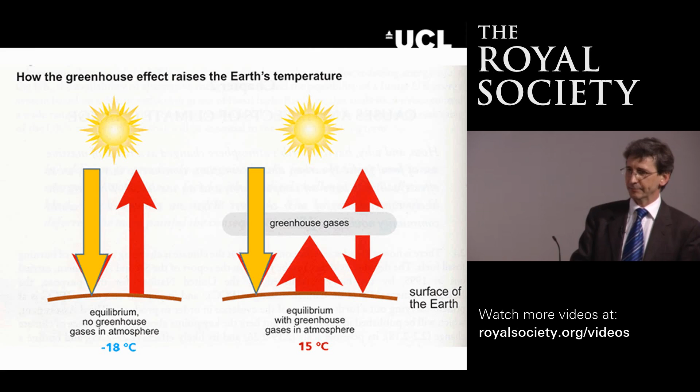If I put the sheet of glass between Chris and the infrared camera, the sheet of glass tends to absorb the infrared radiation. In fact, glass is a bit like the atmosphere of the Earth, the gases in the atmosphere, the greenhouse gases. The glass absorbs the infrared, and the gases in the atmosphere also absorb the infrared.

If you imagine that Chris's head is the Earth and the camera is outer space, and we put the atmosphere in there, then what this is doing is preventing some of that heat escaping. The glass is, in effect, absorbing the infrared radiation from Chris.

Now, not all materials do that. And what I'd like to do is ask Chris to put this over his head. I've been told by Health and Safety to warn everybody not to try this at home.

But what you can see, and what Chris can't see, is that some materials don't absorb infrared. Some materials actually transmit it. And if we had an atmosphere that transmitted like that, then we would find that the Earth was not quite as warm. If you'd like to take that off for a minute.

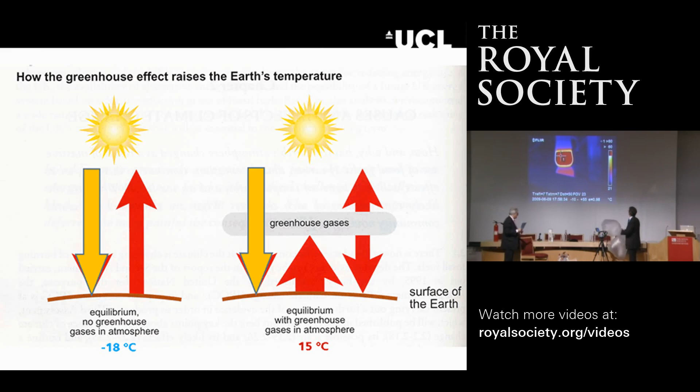Let's see what happens if we look at the top temperature - it's just saturated, which isn't necessarily a good thing. So let's try and see whether this does work. If not, we might have to try it with Chris instead. Let's try redoing this, actually. We might have to add some cold water in a minute. Let me just see whether it brings it down. Ah, right, okay, it should bring it down.

Okay, so this is normal air, and what you should be seeing is that the temperature is now 58.6. This is carbon dioxide, and it's a lot cooler - it's 53 degrees. Well, in fact, it's 40 degrees. So this is because the carbon dioxide in this plastic bag is absorbing the infrared radiation just like the glass was before. It's not doing it as strongly as the glass, but it is actually absorbing it.

Okay, and Chris, if you could just sit back very quickly - there's the last few things I just want to demonstrate. One of the reasons, by the way, that infrared cameras are so expensive is, of course, because the lenses are very expensive, because they can't be made out of glass, since you wouldn't see anything with them.

If I hold a normal sheet of glass, then you don't see any reflection. If I hold this side of the glass, can you see a reflection on there? This is doing something very similar to what you get with a normal metal sheet. Some of you may have heard about putting tinfoil behind your radiators - the reason is because it's very good at reflecting infrared radiation. In fact, even though it's got scratches on, you actually get a very good image. You don't get a very good image in the visible, and that's because of the different wavelength we're looking at.

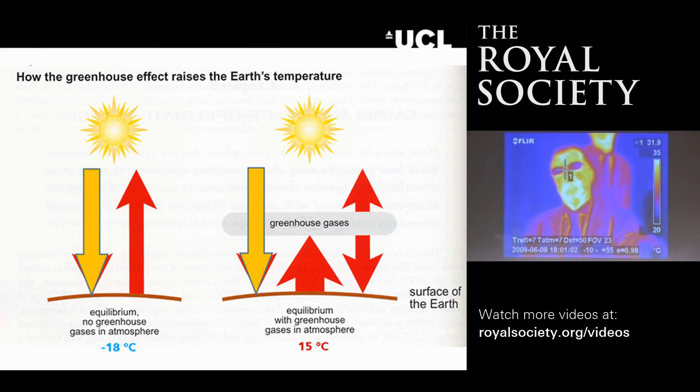But this glass sheet has a property similar to a metal sheet, but it also transmits the sun's radiation. It has a special coating, a low emissivity coating. Unfortunately it's a very old one that's now oxidized - I've been trying to get a new one. Normally you wouldn't be able to detect that it had a coating on it at all. But if you have double glazed windows with this low emissivity coating, it helps reflect some of the heat back towards the room, meaning you can have a double glazed window with the same thermal properties as a triple glazed window. So thank you very much, Chris.

Big round of applause for agreeing to do that.

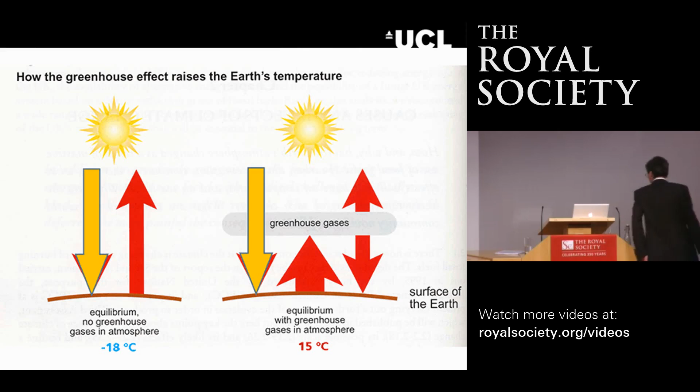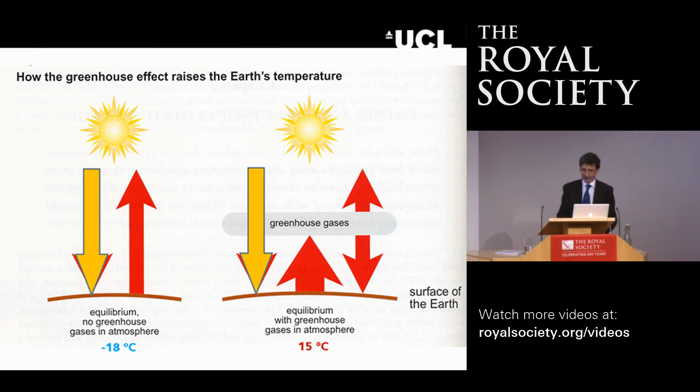Okay, so hopefully that's given you some general introduction to the greenhouse effect, and that you can even in a room demonstrate some of the properties. In fact, we'd have needed a bag about 3 meters in diameter to replicate the amount of CO2 there is between the ground and space, because that's 100% CO2 in that bag. Okay, let's go the right way.

So we need to reduce the emissions of carbon dioxide into the atmosphere, and a large proportion of the balance in the amount of carbon dioxide we have is associated with burning of fossil fuels. Just like Chris keeping his body warm and burning food, he also emits CO2, and when you burn fossil fuels, you will also produce carbon dioxide.

You can see here one of the scenarios for the future - there are many scenarios produced for the UK, for the world, about how CO2 emissions might change in the future. This is done by the International Energy Agency, and what you see is that they're predicting CO2 levels to rise into the future to very high levels, which will cause all sorts of climate change problems, unless we can take a load of measures to reduce that. We really need to reduce it to a trajectory, this lower trajectory here, in order to prevent climate change having severe impacts on the way the whole world operates.

Now, normally, in almost all scenarios that are carried out, there isn't one technology that can fix the problem. In fact, each of these wedges here are different technologies that the International Energy Agency has looked at, that it's looked at as possibly being introduced into the future to reduce CO2 emissions down to the levels that we need to.

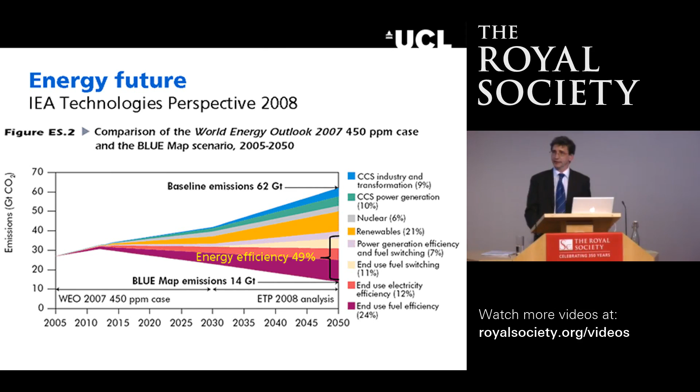So it's actually quite important that we start to move in this downhill trajectory. And to do that, we have to use existing technologies. We can't use carbon capture and sequestration at the moment because we haven't developed it fully. But a lot of the energy efficiency technologies we already have available.

So just to explain again why tackling the existing domestic buildings is key to tackling climate change: worldwide, about 30 to 40% of all primary energy is used in buildings. And in fact in Europe it's higher, in developed countries it's higher, and in the UK it's close to 50%.

The climate change bill in the UK mandates us to an 80% reduction. That's a very large reduction in CO2 emissions, and we will need to put all of the tools into action in order to achieve that target by 2050. UK domestic stock is responsible for almost a third of UK greenhouse gas emissions, and still we use a lot of energy for space and water heating, and we will have to tackle that somehow.

And it's not the new buildings that are the problem. If we're looking at 2050, then the existing stock is already here, that will be here. It will also be here in 2050. And if all of this wasn't enough reasons to try and look seriously at doing major refurbishment to the UK stock, there are other reasons other than climate change which make it important.

There are issues to do with comfort and health in buildings, and to try and eradicate fuel poverty, and also security of energy supply. If we don't tackle demand, energy demand, the infrastructure consequences of building large numbers of power stations, whether they're renewable or nuclear, and the infrastructure to support those will be massive unless we reduce our demand.

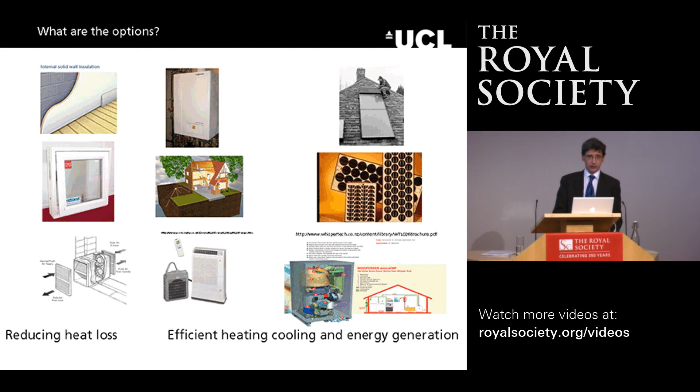And they broadly break down into the technologies that reduce heat loss by insulating the walls, either in cavities, internally or externally, reducing the heat loss through windows, reducing the heat loss through ventilation, improving the efficiency of our boilers or using boilers like heat pumps, which have high efficiencies, or using microgeneration technology, solar hot water heating, photovoltaics, micro-CHP, and also better control systems to make sure that we only use the energy when we really need it.

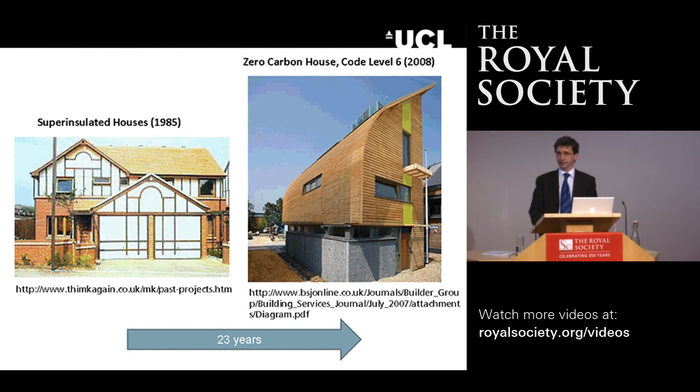Now, on one level, we haven't really done a lot over 23 years, and we drastically need to make a very big improvement if we're going to achieve something. So the challenge really is how we deploy the appropriate technology to 24 million dwellings within a very complex system. I'm going to give you some impression of where the complexity in a lot of this problem occurs.

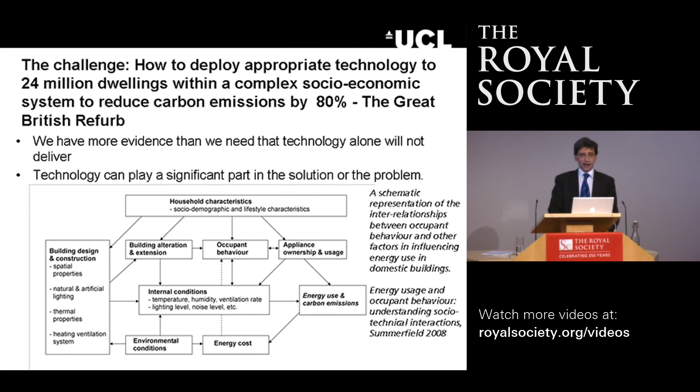But it's not just about designing and building buildings, it's about how people and occupants interact with them, how people use appliances, how they decide to heat them, the environment they keep in them, and that's partly affected by the price of fuel. All of that determines how much energy we actually use or how much carbon is emitted. We have more than enough evidence that technology alone will not deliver the solutions.

Now, part of the reason why it's so complicated in buildings to understand energy, and why we've done actually very little assessment of the real performance of buildings, is because it's something quite difficult to get a handle on.

If you have a car, you only use one form of energy predominantly. You put the petrol in it, you drive it around, and that energy is used for one thing, to move you and the car to different places. A building is more complicated. It has many different sources of energy. It can have gas, electricity. It can also utilize the sun's energy.

We do lots of different things. We heat the building, but we also run appliances and cookers. And there's some interesting feedback mechanisms that go on. So if you replace your existing light bulbs with low energy light bulbs, they'll give out less heat, so your heating system will have to generate slightly more heat.

So it's actually quite difficult to get a complete handle on this, and it's difficult to interpret things. I mean, if you went to the petrol station and asked them to fill up your car with petrol, and you went to pay for it, and they said, well, I'm not sure exactly how much petrol you put in there, so I'm going to charge you roughly £50 for that.

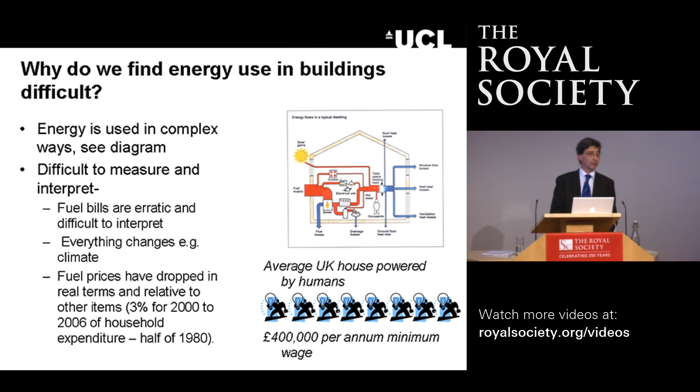We're probably going to have to move, hopefully not all the way to that, but we're going to have to shift our values and our understanding of how we use energy if we're going to tackle some of the problems we need to tackle.

Okay, so the Great British Refurb. The government has recently had a heat consultation in which it has proposed that by 2030, all our homes and other buildings will have received a whole house package of measures covering all the cost-effective, energy-efficient measures available for that property, as well as renewable heat and electricity measures needed to meet our renewable energy aims. That's actually a great challenge for us to do in a way that helps meet significantly the 80% reduction in CO2 emissions.

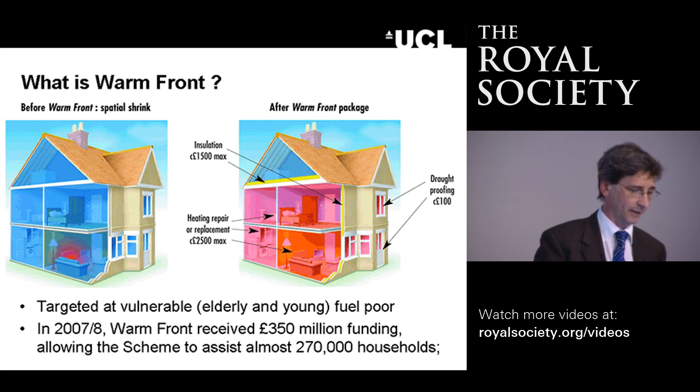The scheme is not directly trying to achieve reductions in carbon emissions. It's predominantly trying to improve the health and comfort of people who are on low incomes. They're eligible for free insulation, a free heating system, more efficient heating systems, and draught proofing.

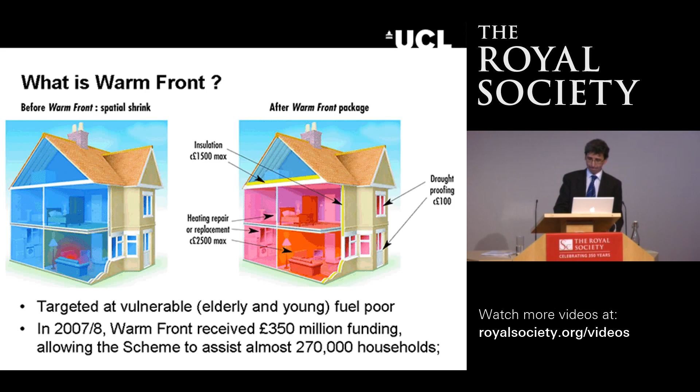We were lucky enough to be involved in a project to monitor about 3,000 homes before and after they had this refurbishment. And what were the conclusions from this refurbishment?

Well, there was an increase in temperatures in livings and bedrooms, which is very good because that's one of the key things that the scheme is trying to achieve. It improves comfort - people felt much more comfortable. It reduced fuel costs, so people saved money. It reduced the occurrence of mould, so the buildings were more healthy. And as a consequence of these, we've got some evidence that it improves mental health directly and should also reduce winter deaths. In the UK, we have something still like 20,000 excess winter deaths.

But what does it do to energy use? Well, the mean energy use actually rises by about 34% as a result of this. And even if we try to measure the energy efficiency, in theory we would have expected the energy efficiency as a result of these measures to improve quite significantly, but we've actually only been able to detect a marginal improvement. So why is that?

Why is it that in theory and practice are not the same? Well, in theory and practice are the same, but in practice they're not, and that definitely applies in this case. So why is it that theory and practice are not the same in this particular case? Well, we have three hypotheses. One is that we apply the physics wrongly. Not that physics is ever wrong - physics is always right, it's just the way that we apply it.

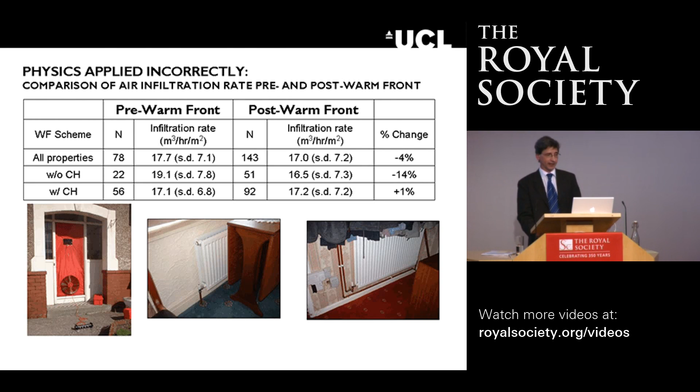So just to briefly give you examples of these - and I'm not going to go into tremendous detail - in the case of the Warm Front, one of the measures we introduced was draft stripping. We sealed the buildings to try and reduce the unwanted flow of air into and out of the building. What we did was we pressure tested these houses, about 140 of them. We put a blower door - the door on the left-hand side with a big fan - which blew air into the building, and how much air goes through the fan determines how leaky the house is.

What we found was that as a result of installing draft stripping in these buildings, we got a slight improvement, a slight reduction in the air infiltration going in and out of the building. So we had effectively sealed up the cracks, but only marginally. We had expected at least a 10%, if not better, improvement. Now, if we looked at the houses which didn't have central heating installed, then yes, we got a much bigger improvement - about 14%, which is more like what we had expected. But if we looked at the houses with central heating, then we got an increase of only 1%.

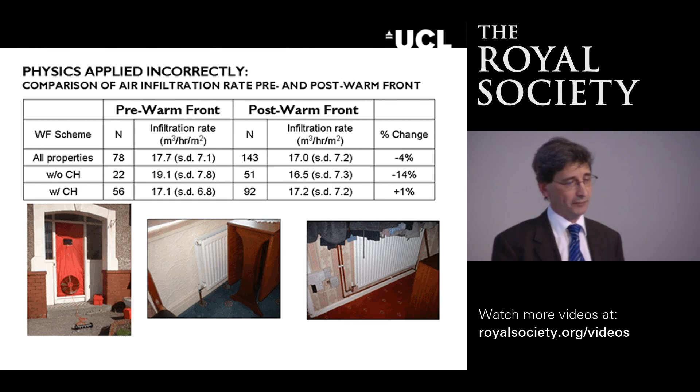A very crude way of looking at this is that on one level you've got a team of people going around sealing up the cracks in the building, and then another team putting in central heating and putting holes in the floors and walls, adding to it. Theoretically, all the models that predict energy consumption say that if you put in draft stripping, air infiltration reduces and you save energy. But they don't say that if you put in a central heating system, it goes up. So we haven't been applying the physics correctly there.

This is an example for new buildings, from work done by a colleague of mine, Bob Lowe, with colleagues at Leeds Metropolitan University. They were involved in a brand new housing development where they spent a lot of effort working with people on site to make sure the insulation went in properly and the building was airtight. Then they measured the heat loss of the building and found it was twice what they had expected.

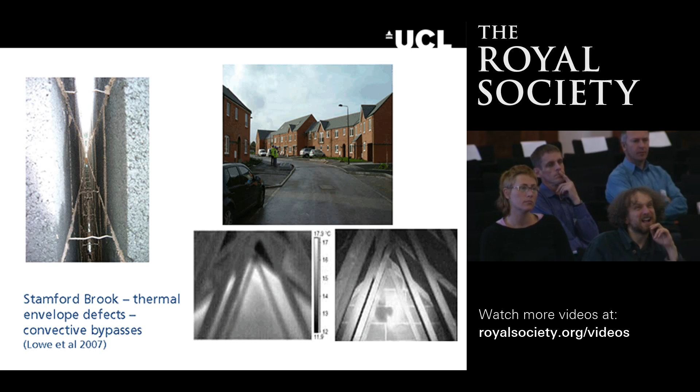They spent quite a bit of time trying to work out why this was. This is an infrared image, in black and white, which shows the party wall in the loft space. They discovered lots of heat leaking up into the loft through the party wall.

When you pay an energy surveyor to come to your house and give you an energy certificate, they will measure the outside area of the building, because that's where normally we think all the heat is lost, through the outside walls. They ignore party walls and internal walls generally, because a party wall is heated on both sides to roughly the same temperature, so you get no net heat loss, or if you do, it loses heat to the adjacent house, and at least they get some benefit from that.

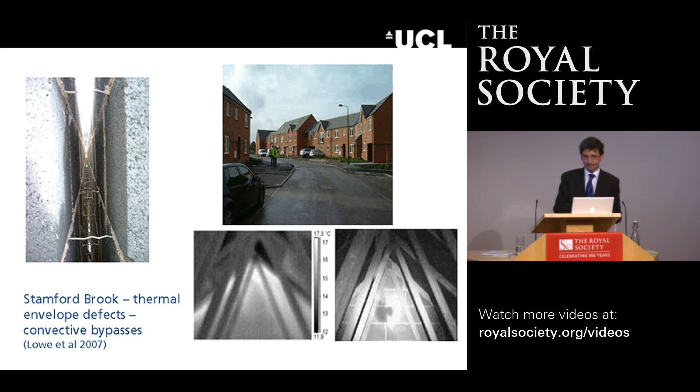But what they found was that modern construction of party walls actually involves cavities, and this is the cavity before the outer brick face went on. This cavity was introduced to stop noise transmission from one neighbour to the other. That's very good, but we sort of ignored that cavity, and actually it acts like a big chimney. It takes heat from adjacent houses into the cavity, up above the loft insulation, and into the roof space where that heat energy is lost.

That means a party wall actually loses more heat than an external wall. That means a terraced house loses more energy than a detached house. That means that if you put an infinite amount of insulation around the outside of one of these houses, it still does not meet what the building regulations are trying to achieve.

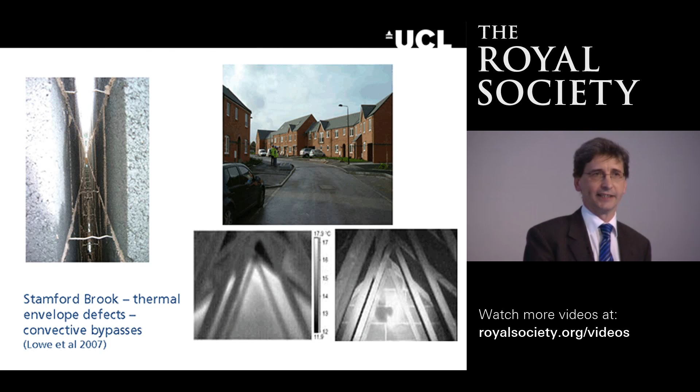The sad thing is it's taken us 20 years to discover this. This construction has been going on, and it's very simple to fix, particularly when you're building the house. You just need to put some insulation in the party wall, and you fix the problem. It doesn't cost a lot of money, it's very cheap to do as you're building it. We need to build a quicker understanding of these sorts of problems, because they are having very large potential impacts.

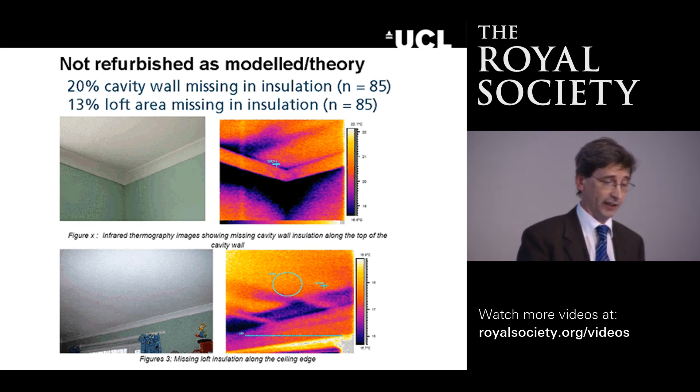Luckily, as a result of that work, they've now changed the calculations, and they're changing the regulations as a result. But what about refurbished buildings as modelled?

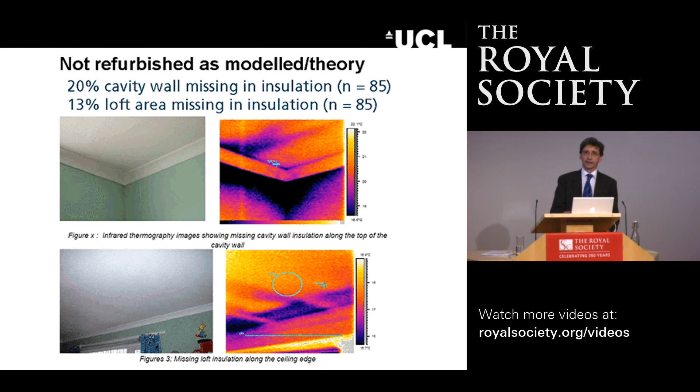It's actually very difficult to get the insulation into an existing building in all the places we would ideally want to, and roughly 20%, 13% in the loft, is missing. That's not just down to poor workmanship, it's physically quite difficult to get the insulation everywhere you want it. We're going to have to work hard to overcome these sorts of problems and try to get the theory as close to practice as possible.

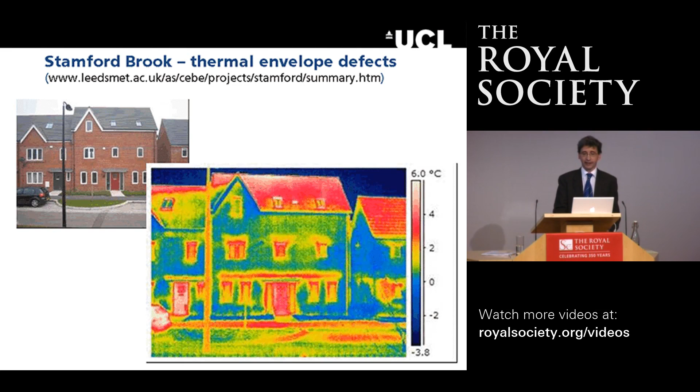And it happens in new buildings as well. Here you can see heat being lost here, which shouldn't be there. The last reason to explain the difference between theory and reality is changes in occupant behaviour. What tends to happen is you add insulation and people take some of that benefit in terms of improved thermal comfort.

That's often talked about as the rebound effect, take back, or the comfort factor. In terms of the Warm Front scheme, that was one of its aims, was to actually get people to be warmer. But any refurbishment project will suffer from this, not only in the fuel poor.

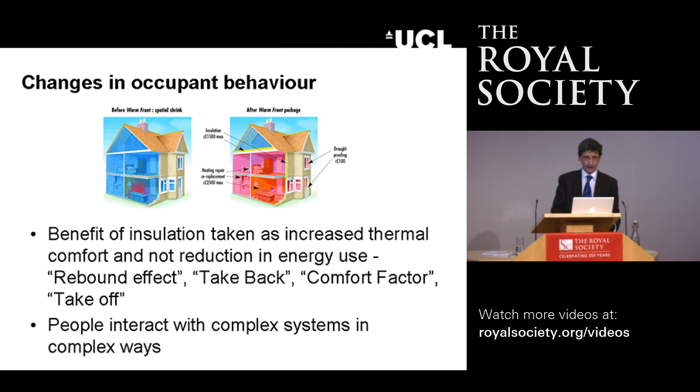People interact with the complex system that you've got in a building in complex ways. In the case of the Warm Front scheme, we introduced new, more efficient heating systems than the existing ones. But we didn't take the existing heating systems out, we left them in. And a lot of people carried on using the existing systems, even though it may have been more efficient to use the new one.

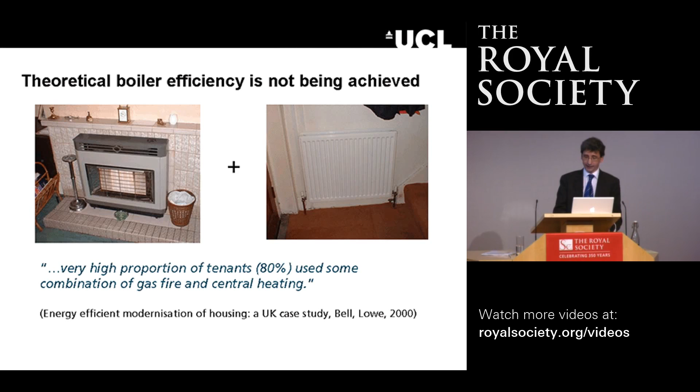An extreme example of the rebound effect is an area I've been researching for a couple of decades now, which is the domestic conservatory. It's very loved in the UK, we build about 100,000 conservatories a year. About 20 years ago, if you built one and had your house energy rated, your energy rating would be improved as a result of adding a conservatory.

The reason for this is that the conservatory traps some of the sun's heat, it warms up the space, it's solar heated, and some of that heat permeates into the building, giving you an extra layer around the outside of the building. However, we had a student who visited 10 conservatories, and she found that 9 out of those 10 were actually heated.

Now, if you heat a glass box, particularly one attached to a new house, that glass box can double the heat loss of the house. That's because, the fabric heat loss aside, glass, even double glazed, will lose 10 times the amount of heat per square metre that a modern well-insulated wall will. Since you've got roughly a tenth of the area, it will double the fabric heat loss of the building. So it can have a significant impact.

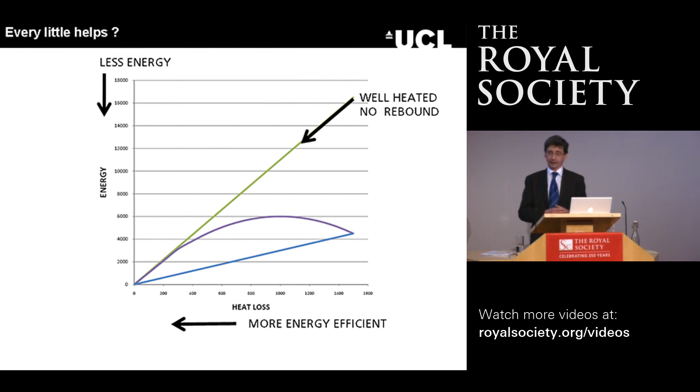Theoretically, the way that many physicists would have modelled it is actually the green line. We would have said the building is perfectly heated in the first place, and we would expect a big reduction from a small change, because we start off with a fully heated building, whereas actually a lot of our buildings are not fully heated. So there is a big discrepancy between the way that theoretically we've been looking at these issues and what actually happens in practice. We need to better understand some of these mechanisms.

Now, people have also changed the way that we behave in buildings. This is some work that colleagues of mine have been doing at UCL on an estate in Milton Keynes, where we've gone back to an energy-efficient estate some 16 years after it was built. These are new buildings, built as energy-efficient buildings. How do they now perform 16 years later?

What we found is that energy consumption has risen in them, particularly electricity, which has gone up quite significantly. If we split the groups of people up into those that didn't use a lot of energy 16 years ago and those that did, what you find is that it's the gas guzzlers 16 years ago who are now gas guzzlers even more. The increase has come predominantly from the high-consuming groups.

Now, we've got to start tackling the fuel-rich. We've got policies to cope with the fuel-poor, but we are going to have to start tackling the fuel-rich. It's quite obvious why this happens: they're obviously the people who are more affluent, less affected by fuel price, but they also have bigger houses.

They have bigger houses with more rooms to put more plasma TVs, and bigger rooms so they can put bigger plasma TVs in. They have detached houses so they can put bigger extensions on, and they can put more extensions onto the house than if you're living in a terraced house.

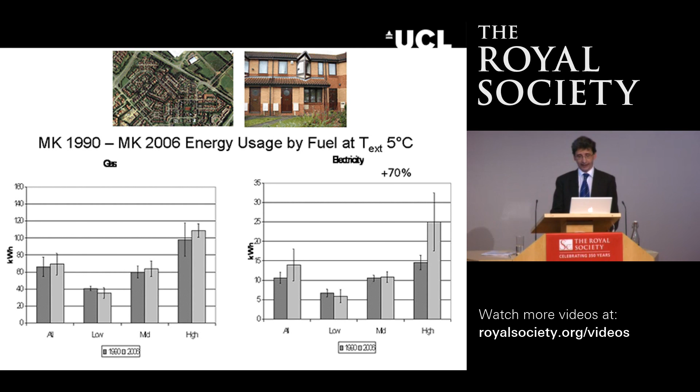So we're going to have to start looking at policies that address that. There is a wide diversity of energy consumption, and energy consumption varies tremendously between individuals.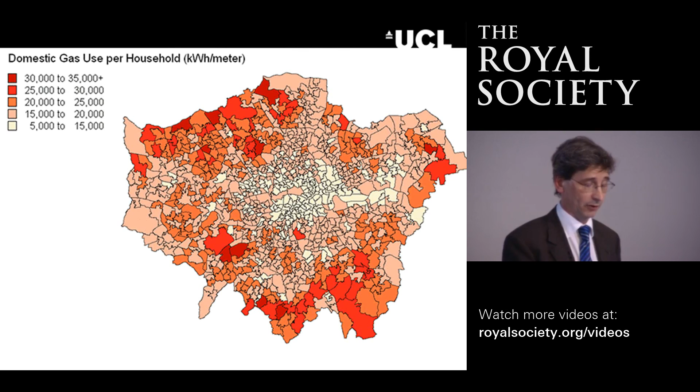In London, we use slightly less energy, in part because in some areas of London we occupy very dense housing. We don't have very big houses in some parts. In other areas, like the peripheries, we have very low densities, and we have very affluent people in those houses who can use a lot of energy.

We have snow in there kept at minus 2 degrees all year round, and we've been able to do that because we've got the energy-efficient technology.

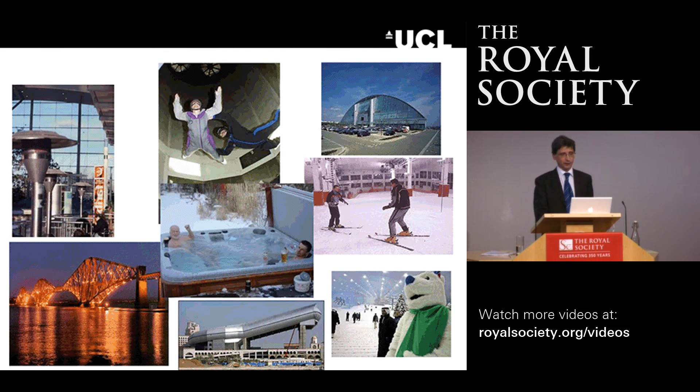What Milton Keynes does one day, Dubai follows the next day, and they've now got a bigger snow dome than we have. But Milton Keynes is trying to keep up pace — we've also got a skydiving centre now, which also uses energy up.

We need to tackle health in buildings as well. Our buildings are reasonably healthy at the moment, but we do have excess winter deaths and some excess summer deaths. We also have people dying of carbon monoxide poisoning. We need to be careful that when we carry out the Great British Refurb, we don't make things worse. We suspect in most cases we will make things better, but we will need to put a lot of effort in to make sure that really happens and really delivers.

So just to conclude, I think the Great British Refurb is essential if we're going to hit our targets of carbon emissions reductions. We're going to have to tackle the energy use in our existing building stock, and not just by a small amount. If we do it by a small amount, we're likely to actually increase our energy consumption. We're going to have to do big changes to put us over the hump. It's going to be the greatest engineering challenge this century, I believe. It will not be easy or cheap.

For a long period of time, grumpy old energy men like myself have been going around trying to convince the government to do something about the built stock. We've probably oversold how easy and cheap it is, and they're going to get us on that one if we're not careful. It's going to be quite a strong government who's going to actually push through on doing these changes. These changes will have to be supported by advances in technology, but also a better understanding of how we interact with that technology. We'll need real verification that we really are going in the right direction. We can't afford to wait another 20 years to find out we've done the wrong thing.